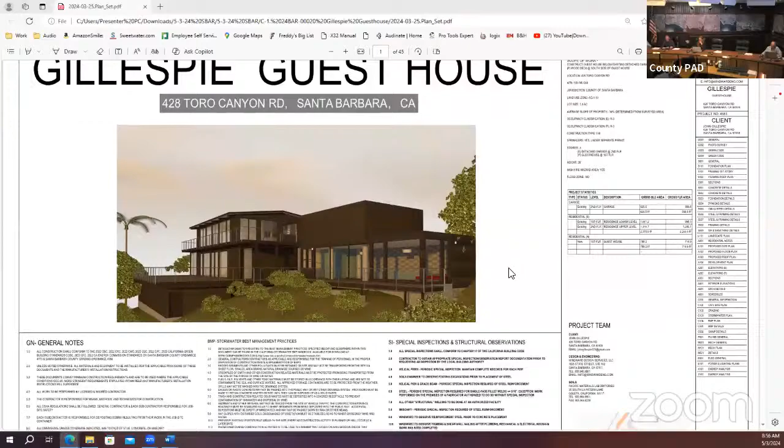This is the consent calendar for the May 3, 2024 SBAR. There's only one item on the agenda: 428 Toro Canyon Road, the Gillespie Guest House. We have two important comments — it's a nice project, very technical and landscape appropriate. I just have one question, on the second page, about whether the pool deck is not part of the project. Yes, that's correct. Between pages 30 and 35 you can see the project, and it's pretty well done.

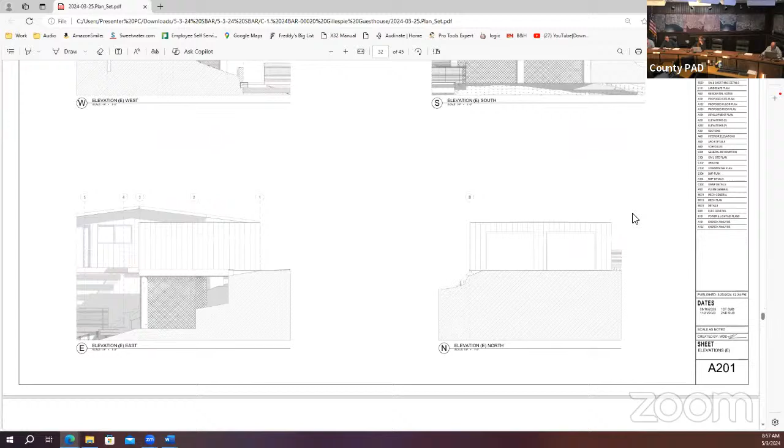Go to page 30, I think that's where they start showing the project. There's a lot of civil detail because they're civil engineers. The materials aren't very well shown, but they're matching the existing, right? Yes, our proposal is to match the existing. And there's no landscaping shown, right? We do have a planting plan — it's a landscape plan that comes before the architectural sheets, right before our site plan.

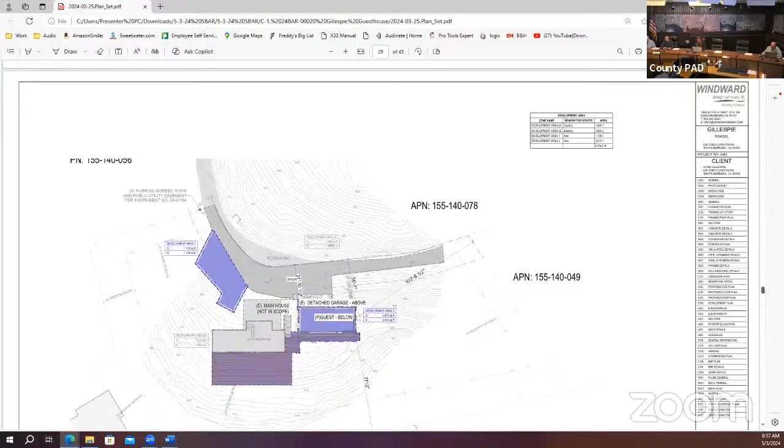Actually, sorry, it's toward the end. Was this it? Yeah, there's somewhere at the end — there it is, this is our planting plan. And the proposal is right above this image, top left. It's just like Yankee Point — a deep shrub, natural plant for hillside retention. I think we saw it before. It's all good, very good. So we'll approve it at the main meeting, okay? Very good, thank you. That completes the consent calendar.

I forgot my phone and my bicycle. Okay.

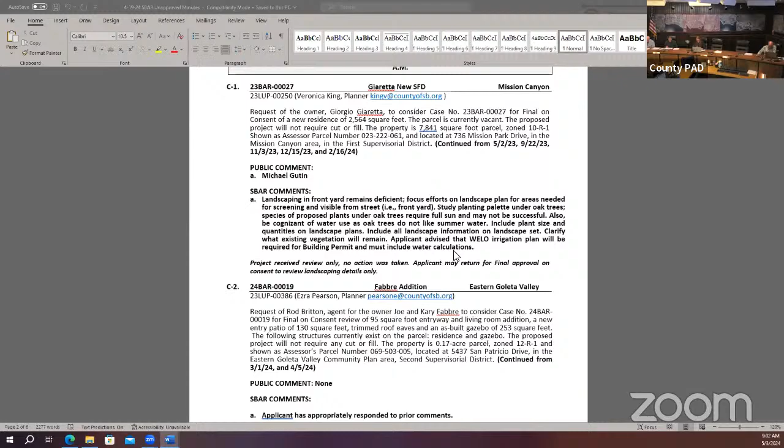Right. No, I think the second sentence should say restudy planting, not study, but restudy. Yeah, I was suggesting to remove that sentence. Oh, and then just say: provide planting for the front yard that is appropriate for underneath the oak tree. Oh okay, got it, that's better — that's what he said in the meeting. Okay, and then the rest were given final, so we can move on.

Is there a better way to describe the design than squat? Hmm, sorry, what was that? The comment D says the design appears squat in some areas. I think that was a comment from Chris or Alex, regarding the elevation. It's not an architectural term, but I think it's clear — it looks like a pancake. There's no hierarchy; usually you have some elements that are higher and can exceed the height limit, like a tower or a point of the roof. I think that's what the comment is about. I didn't make the comment, but I think maybe Valerie or somebody made it — I think it's appropriate.

We could just say: consider integrating limited architectural projections above the standard 16-foot height limit, as allowed by code, to provide more variation in the roofline. And delete the first sentence about the design appearing squat in some areas — I think it has the same intent. That sounds like you're being mean to him. I know, saying the design looks squat. Not our intention, if you're watching.

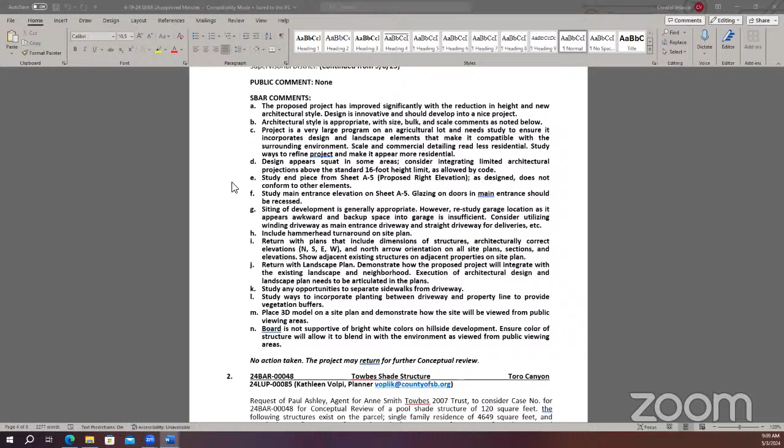I would just clean up the grammar a little bit: this is a very large project on an agricultural lot, instead of 'project is a large program.' Okay, yeah, this is a very large project on an agricultural lot, etc. Okay, good, great.

The next one, maybe we can skim past 2 and 3. Item 4 has some comments.

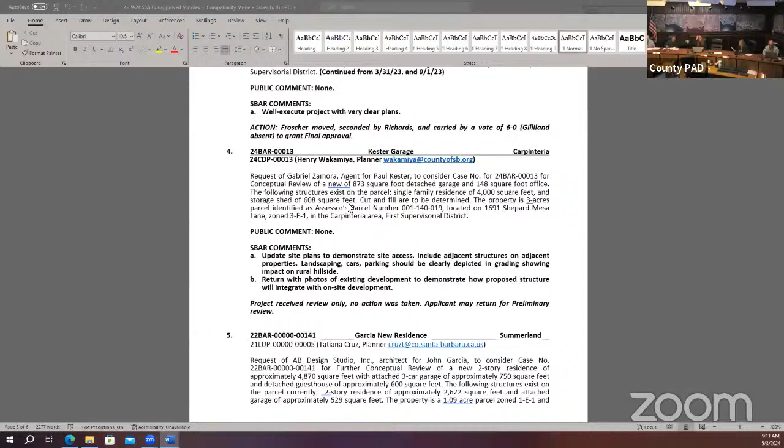I would upgrade the first sentence to say: update site plan to show pedestrian and vehicle access. Okay, that's it. It also says landscaping, cars, parking — landscaping and car parking should be clearly depicted.

It's confusing, landscaping, cars, parking. Well... semantics.

Just to ask the landscape people, what does C mean? Landscaping is sparse on landscape plan. Does it mean the landscape seems deficient or sparse or limited? How would you like to say that?

I mean, the next sentence describes it a little better: show existing planting and increase planting to biomass throughout. Okay, if you're happy with the first sentence... you almost, I guess we don't need the first sentence, but the second one is more descriptive. Okay, eliminate the first sentence then.

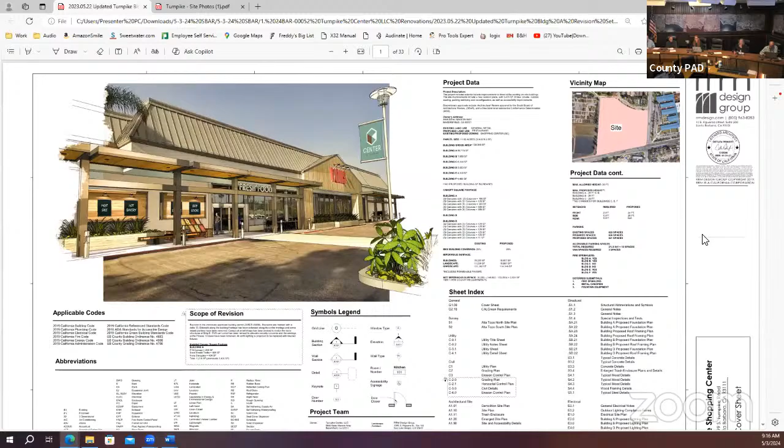Actually, go next sheet. Probably like 3 more sheets after the civil. Next. There's a lot of civil sheets, right?

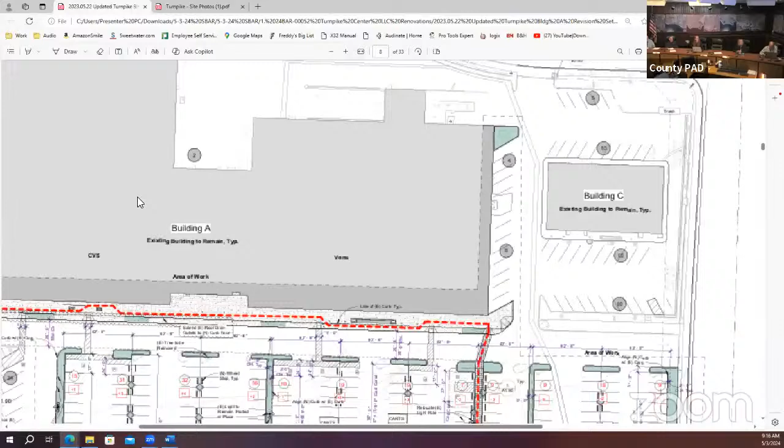If you zoom into the Building A portion, yeah, so previously we had widened the sidewalk just in front of Vons, and now we're continuing the expanded sidewalk all the way down.

We've taken away some planters that were adjacent to the building just for waterproofing and logistics. The planters themselves were getting very narrow to separate it from the building. We've replaced those with some movable pots that are fairly large, and we've got a couple of them over at Building B as well, so it'll be consistent through the center.

Next sheet, go down to the elevations, I think I'll—all right, if you want to zoom in, the clouded areas are kind of what we've revised.

Our planner asked. So in these, we've added a concrete base to match Lighthouse Coffee—before we had the siding going all the way down, and just logistics of shopping carts and things. The concrete base was nice. There were 3 awnings on this, and I think by the time signage gets up there and everything, it looked fairly busy, so we've removed the awnings. There was a building mounted planter there, and in these elevations, I'm not showing the movable pots or the bike racks or the benches, and so all of those will kind of fill in the space adjacent to the building.

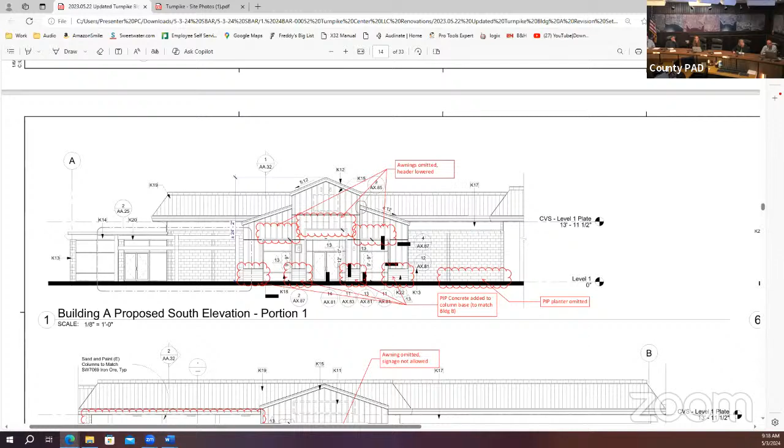If you scroll down a little bit—sorry, just for clarification, that's the Vons elevation. That one is actually Fitness 19. Okay, so I'm starting from the west side.

This is CVS. CVS had an extended pop out that was primarily for carts, but really CVS doesn't have that many exterior carts, and there were some security concerns that it might be hard to secure and somebody might be sleeping in it. They've had an instance of a fire in front of the future cantina area, so we're trying to eliminate an area like that. That's opened up. Again, the concrete base, and we omitted an awning there with the signage. It was fairly busy, and I think looking at the Lighthouse Coffee facades, it just wasn't necessary to have the extra awnings.

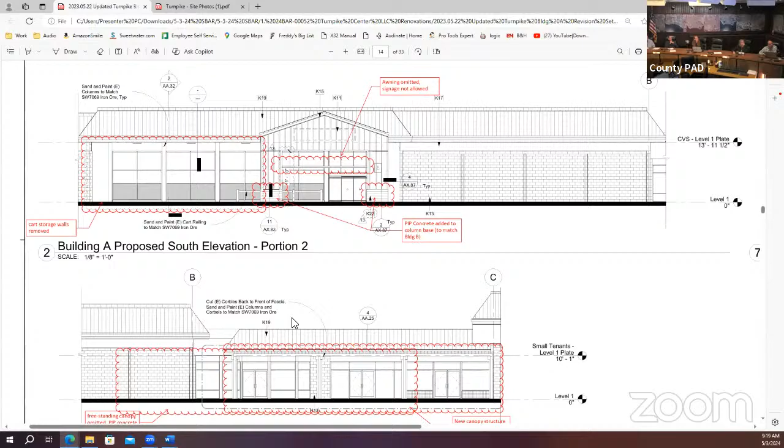Scrolling down, and oh, go back up actually. And this—the owners have acquired a large bronze duck, similar to some of the others that will be in this little area, kind of for kids to play around and nice energy for outdoor seating.

Scroll down, please. This one is kind of the west end of Vons. We just shortened the trellis that was in front of there. And I think we've added some bike racks and pots there too, just to make sure we have enough room for the bikes that are currently cluttering the sidewalk.

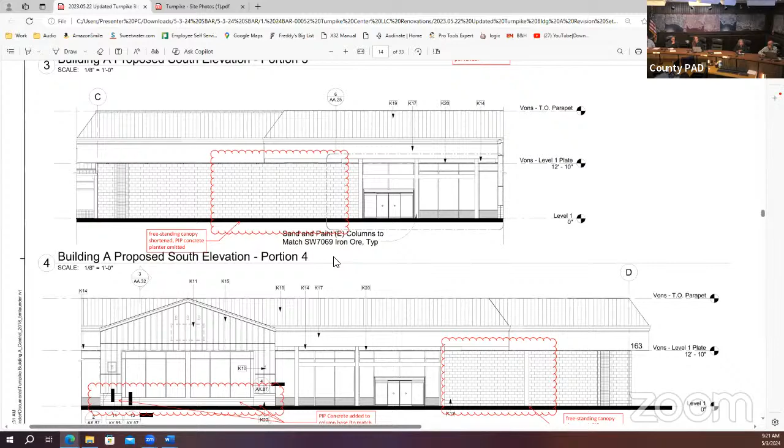Scrolling down to the front of Vons, I think we adjusted that planter a little bit just to make sure we had room for the carts and people walking by, and to maintain our fire lane, and also kind of shrank that trellis that's adjacent to it.

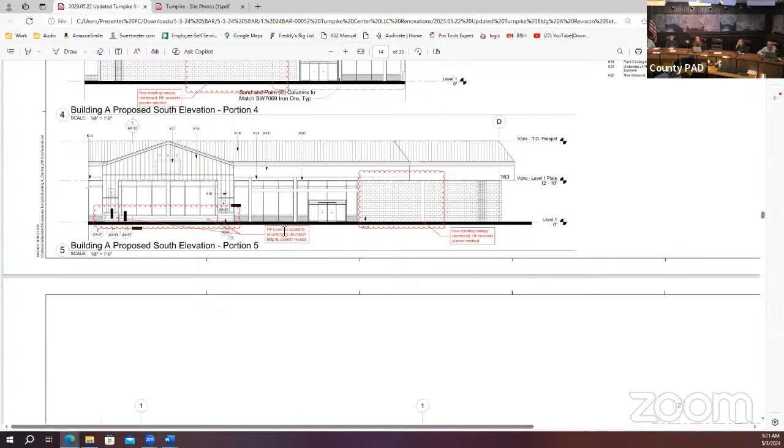Yeah, I think that's it. We can scroll down to the landscape plans towards the end. Yeah, yeah.

Yeah, so kind of zoom in to any of the building. Can we zoom in on that - just really, what's changed in the planting plan, Dan? Yeah, I mean, yeah, this is fine. Scroll up towards the building.

Zoom in. Up, yeah. The parking lot hasn't changed, but we're just kind of showing some benches and pots and

some bike racks - they're very faint on there, but the large duck isn't shown on this. I think that's the bulk of our revisions.

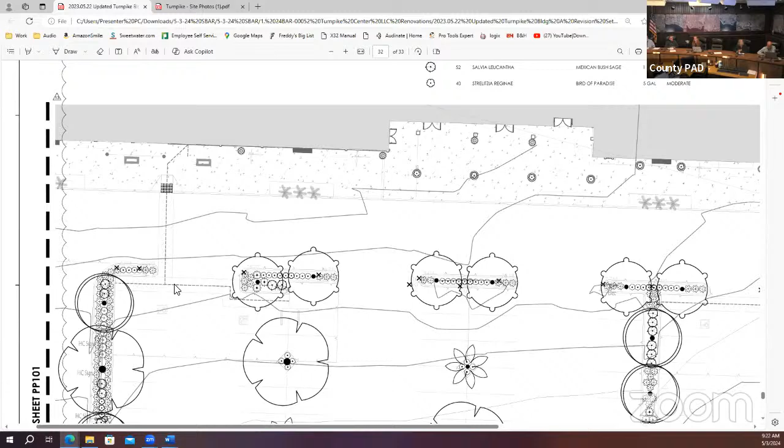Okay. Thank you. Any questions from the board?

On this plan, where were the planters that you removed along the building? I think there was one on either side of the recess - you can walk up and demonstrate. There was one on either side here.

Okay, and there's pots now. Yeah, there's several pots - all of those are pots. And where are the bike racks? There's the bike rack, there's a bike rack.

Are the pots or bike racks identified in terms of what they are on the plans here? Yes, they should be. I had sent a photo to our planner, but I don't know if that's in the files.

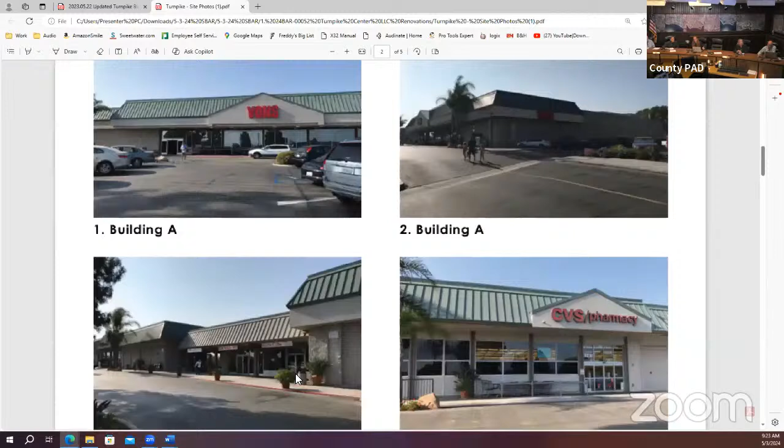Go back up. No, they weren't in yet, but there's an existing one in front of the Lighthouse Coffee. They're the concrete ones - the big concrete ones.

We have both trash cans and planters that match. There was an image in this that had Lighthouse on it. Yeah, go down. Yeah, but I think it was before we got them.

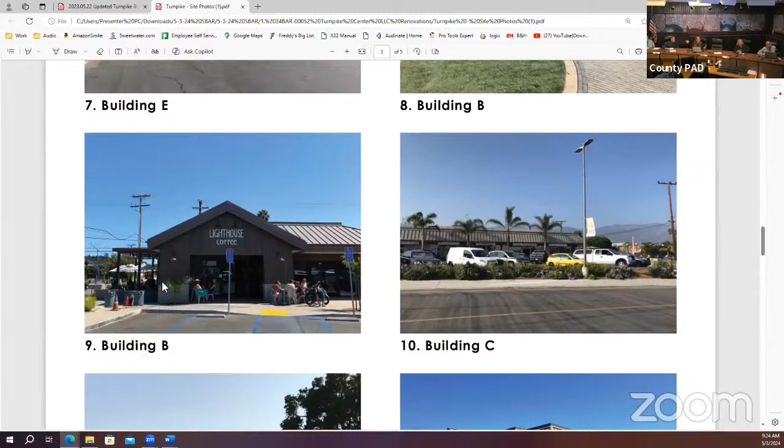Still - oh yeah, right now there's one sitting right there. It's not there, I remember - right there, smooth concrete, probably about 42 inches tall. Yeah, they're probably.

I have a question. On sheet AA31, do we go there? The light fixtures seemed kind of big.

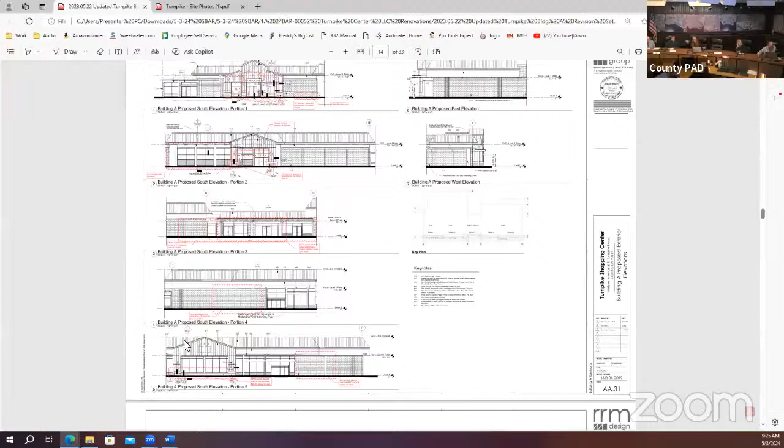Yeah, it's AA31. Those - these light fixtures, or the ones above the sign? They're kind of large. Have you changed those or?

The actual spec was approved previously under our previous permit, and they're installed at Lighthouse currently.

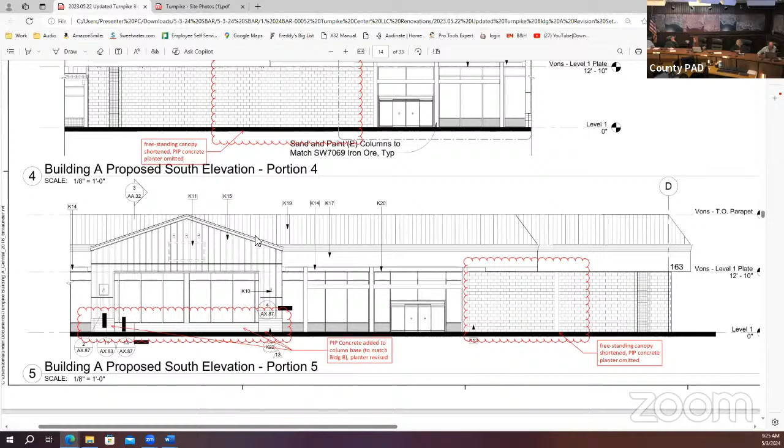Well, maybe I noticed in the perspective - let's go to the perspectives, the first sheet. Scale.

That's the original. Oh, okay. You mean those? Yeah, yeah. Uh-huh.

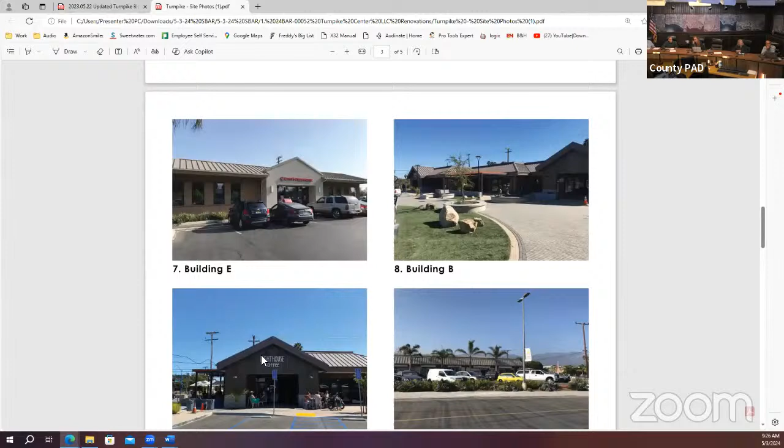Go back to the photos, please. There. Those and those are the ones that are spec'd. Zoom in - it's kind of blurry, but pixelated. While we're on this image, I have a question too.

So your original perspective of the trellis - it's enclosed, like it has a surrounding fascia on it. Will you see the rafter tails on it in front of Vons? Are you proposing the exact same in detail?

In front of Vons, no. But the small shops will be like this version of the trellis. And I can show you what the Vons one might be.

Scroll down. Yeah, right there, stop. The Vons trellis will be similar to those in front of the old one - can you zoom in on that? And we're all saying different things. Okay, yeah, that is what's proposed in front of Vons.

Okay, all right. I also had a question about the parking. If I remember right, just from driving in that parking lot, some of the aisles in front of Vons, even though they're 90-degree now, there's only room for one directional traffic - it's an undersized aisle.

Yeah, I think there's one wide one right now - maybe that's it. And they will be 62.5 feet. Will all get fixed. Okay.

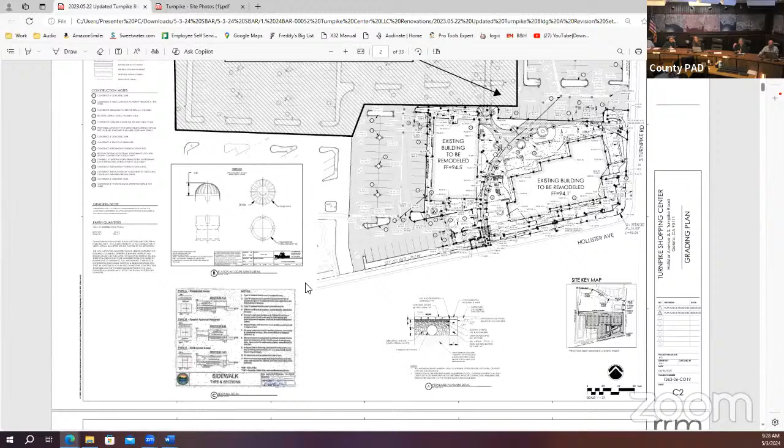Yeah, I just had a question. If you can go to a site plan, something that shows a site plan. Well, go down a few sheets, a larger one, yeah.

So in front, you mentioned that you removed the planters next to the buildings because they are awkward and have water problems and so forth. Did you add any other landscaping in between? I'm not sure which drawing it is. Yeah, because that wasn't showing.

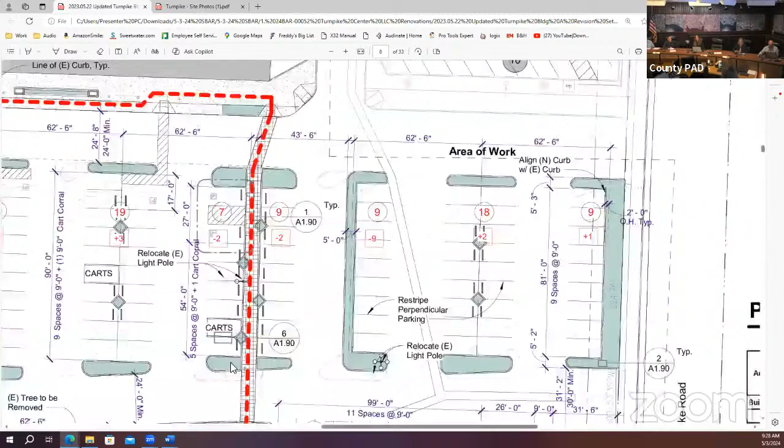Keep going, that's getting close. Zoom in, yeah, this one right here. So I think those were planters, yeah, there are some planters, show it closer to the building. Closer to the top building, the Vons building, yeah, there you go. So we've maintained these planters that have some palm trees in them. And what did you put, new planting? I didn't see anything. There's new planting going in there. Something significant. Okay, all right.

Okay, any other questions from the board? All right, we'll move on to public comment. Is there anyone in the audience or online? We have a couple of people online. If you would like to speak on this item, please raise your hand in the chat. Or if anybody in the audience has a public comment.

Seeing none, all right, we'll move on to comments from the board. John, do you want to start? Well, I think generally it's okay. They're adding more planting in the parking lot, which I appreciate. And I like the new entrance to the main entrance to Vons, better definition and a little more residential in scale, perhaps. So I think generally it's an improvement.

Alex? I agree. I just want to make sure that the landscape architects on this board take a good look at the landscape plan, because usually shopping centers are deficient in general. I'm not making any aspersions, but in general, shopping centers could use a lot more landscape, I mean in terms of volume, tall trees.

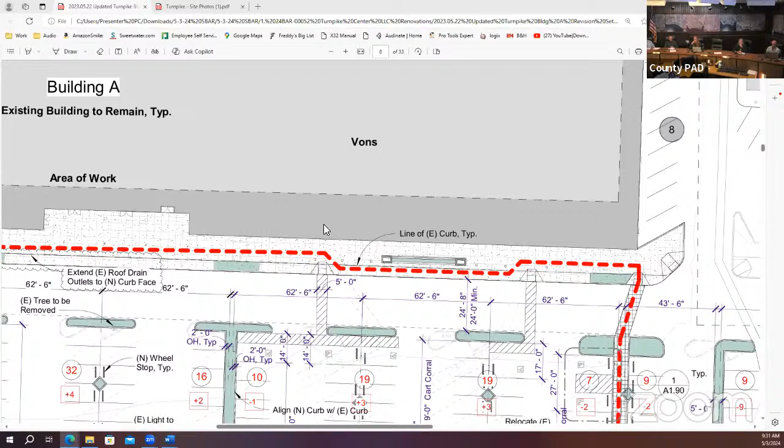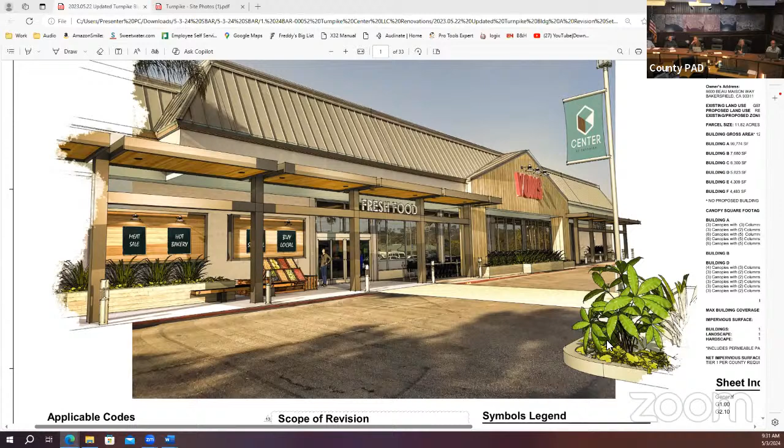You want to go up to the render? Original, that's the original approval. Yeah, with the planters, the planter on the left side is gone, but the planter under the Vons signage is still there. Oh, there is. And how much did you shorten the trellises? Are they shortened from what's shown here?

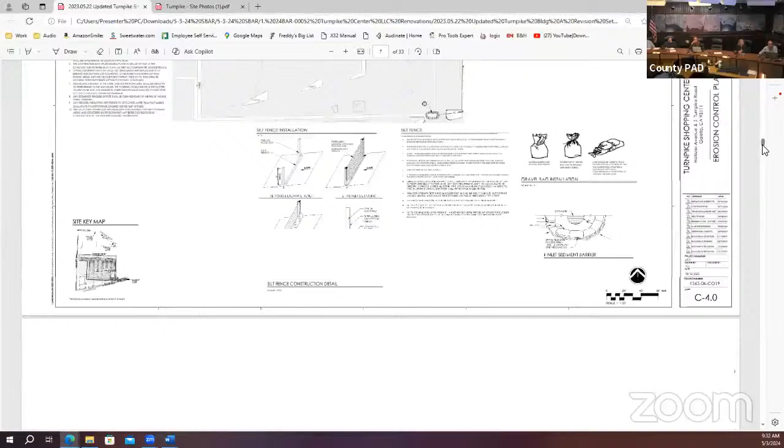I think you just want to make sure that all that planting looks consistent with what you're proposing. And it would be nice to see what's gonna go in the pots and the bike rack, I think. That's my comment. I agree, seeing the pots, I also think studying whether there's an opportunity to have maybe a different size of the same style pot, like maybe it's wider and squatter so you can get a small canopy tree or something in there. Cause if I remember right, the current size is upright and vase shaped, so it isn't really a tree pot, I guess. So if you can get more variety in there. And then I agree with the comment to make sure any existing planters, I think, are gonna see some damage through construction, so if you can show proposed planting in all of them.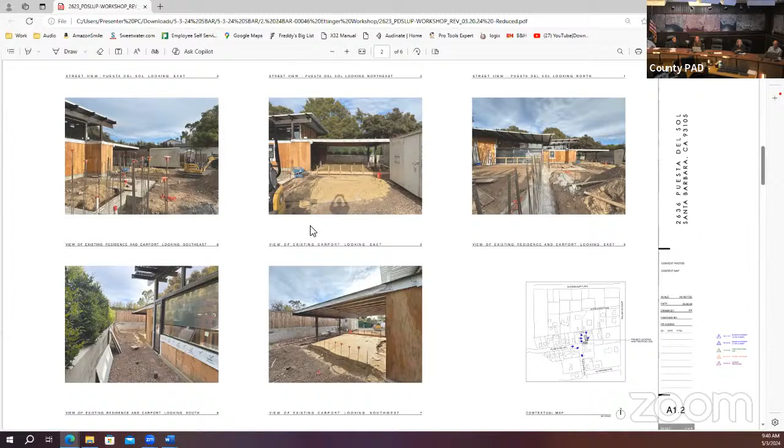If we go to the next sheet, you'll see an existing permitted site plan on the left showing the carport, and the proposed enclosure of the carport on the right, shown shaded. We still meet the Santa Barbara County parking requirements: 2 for the house, 1 for the ADU, and 1 as required for Mission Canyon, so 4 total off-street parking spaces.

If you could go to the next sheet, please. Same idea — if you could scroll up just a tad, there you go, so you could see both plans at the same time. Carport on the bottom, you can see those three little storage pods to the north. That's all we have in the entire project; one's taken over by our utility area. So the proposal at the top is to simply enclose that area and convert the middle one into a little toilet room, top center.

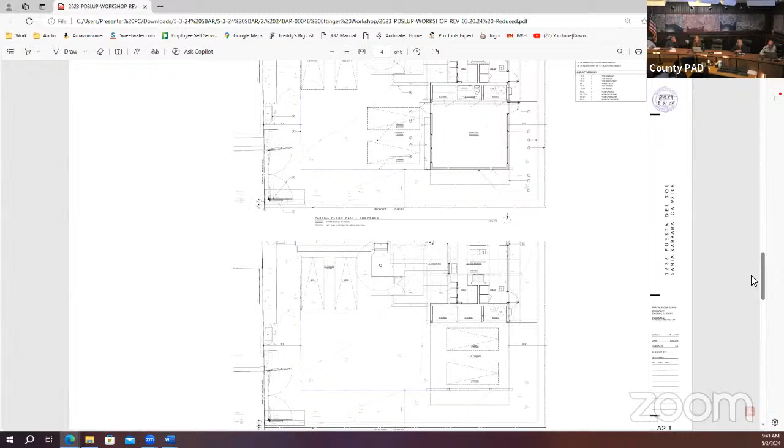If you could go to the next sheet — left-hand rendering as permitted, right-hand rendering with the enclosure. We're trying to downplay the entry to that space so it doesn't compete with our entry into the house, which is back beyond in the courtyard. The materials will be the same, 1x6 clear redwood that you saw in some of the photos. We're not proposing any changes to the landscape, drainage, or grading, or to the footprint — merely enclosing that space.

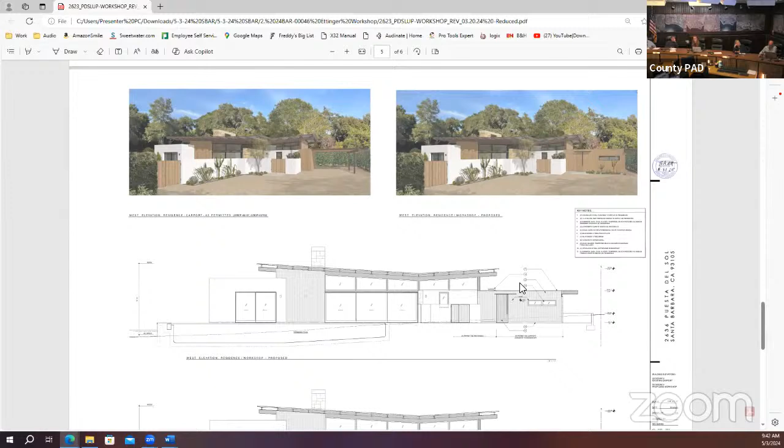You can see the architectural drawings at the bottom. Again, they're composite — the one you're seeing is the proposed, and if you scroll up a little, kind of redundant, there we are again with the carport. Then scroll down to the last sheet, please.

Again, comparisons on the left side, upper, the carport as viewed, and on the right side, cladding with the redwood, not really seen by anybody — it's pretty tight against the southern property line. On the middle sheet, there's a high clerestory window in the workshop with a glass door to let in a little light. Again, all the materials are the same, no other changes. It's about 370 square feet of enclosure added to the project.

Thank you. Any questions from the board? Was it frustrating for the owner to work with their architect like that? It's really challenging, to tell you the truth — we just have big spaces with no storage. It's a predicament that should have been avoided, but this is our proposed solution.

Any other questions? All right, we'll move on to any public comment in the audience or online. If anybody has a public comment, please raise your hand in the chat. Seeing none, move on to any comments from the board. It's pretty simple, so if anyone has a comment, I'll just... yeah.

I think it's fine to move on to prelim final on consent. Agreed — good to go? Good to go. Thank you very much, thank you. Nice day, thanks, enjoy your storage.

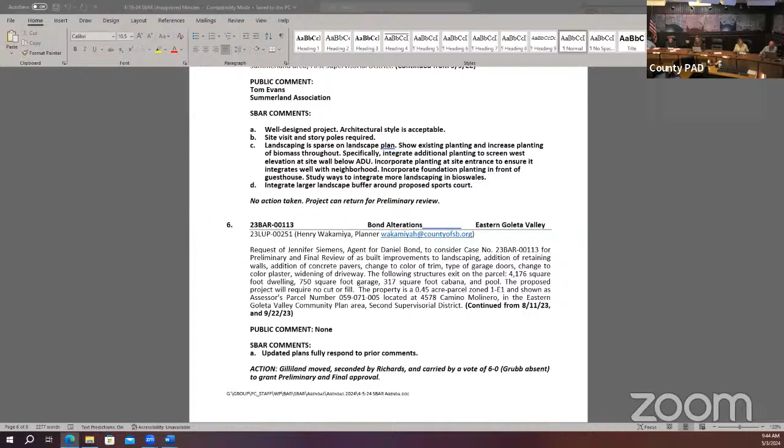Moving on to item 3, Anderson new single-family dwelling. The request of Heidi Jones, agent for Charlie Anderson, here for conceptual review of a new 2023 square foot single-family residence with a 609 square foot 2-car detached garage on an existing vacant lot, with uncovered parking, storage, deck, pergola, and associated landscape and hardscape. It's a currently vacant parcel, and the project will require 710 cubic yards of cut and 140 cubic yards of fill on a quarter-acre parcel located at 1429 Orange Grove Avenue in the Mission Canyon area.

The applicants can state their name and give us their presentation. Good morning, Heidi Jones here online. Chris Cottrell and Aaron Carroll are there in person.

I just wanted to give a brief bit of background. This came before the board in 2019, pre-pandemic, and several things transpired since that time. The board liked the colors and materials but wanted them to study the massing, and there were some neighbor concerns. Since then, the massing has been significantly reduced, the square footage reduced a little over 800 square feet, and the height reduced too. I think it's a great improvement upon the prior proposal. We've got a new team on board. Hugh Twibell should have sent comments to you from the Mission Canyon Association review that were positive. Received, great. So I'll pass it on to Chris and Aaron.

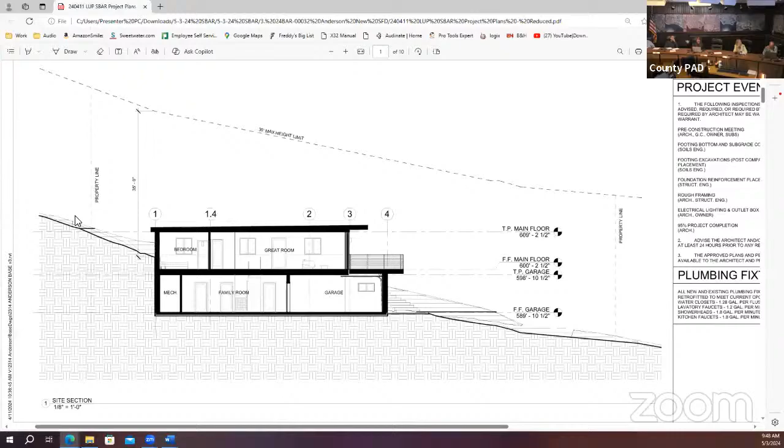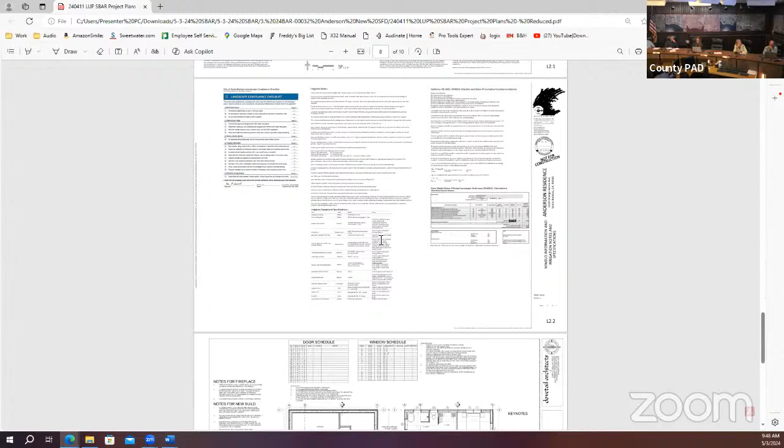If you go to page 8, I'll walk you through the plans quickly and then hand over to Aaron. The left side is the lower floor plan, with the garage, family room entrance, and interior stair, or you can get up to the main floor if you take a right parking on the driveway. There's a nice stair that uses the existing grade to get up to the front door. The owner is a local mason, so all the stonework is being built by him, which is a treat — I think it's going to be a nice little jewel.

The last page is just the elevations. The top elevation is looking from the end of the road — that's a view that doesn't really exist, since there's a steep hillside there. The middle elevation is the front elevation: stone base, stucco top, dark anodized windows. On the lower elevation you can see the stone datum coming up to the window line, so it's kind of coming right out of the ground. It's going to be a really nice looking little house. I'll pass it over to Aaron for landscape.

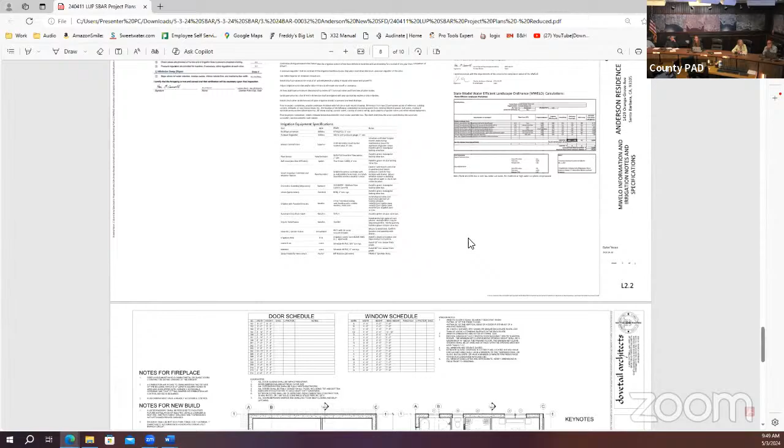If you want to go to sheet L1.1. There we go. This is the site plan.

Orange Grove is a private road and it's just getting extended. This is the last lot on the road, and it's not paved all the way to this lot. New paver driveway, and the owner is a stonemason, as Chris mentioned, and he's going to have fun building those steps.

He really wanted an organic design for the front entry stairs, so boulders, Cherokee stone with a handrail. And there's a little entry trellis there at the front door.

And then on the south side, we're terracing stone walls there to meet grade there, as you saw on the elevations.

There is one medium-sized oak tree that's in the way of Orange Grove that we are proposing to transplant. But we also are going to be mitigating for that tree in case it doesn't make it, so we're mitigating with one 24-inch box oak.

Next page, please. The owner really wants the landscape to be fire safe, understandably so. So the plant palette is almost entirely succulents, with the exception of the oak trees.

Lots of drought tolerant succulents, some of which he's already grown himself, but he's going to use. So a lot of agaves, echeverias, dudleyas, things like that. And then the existing chaparral type plants, which is like laurel sumac and stuff like that.

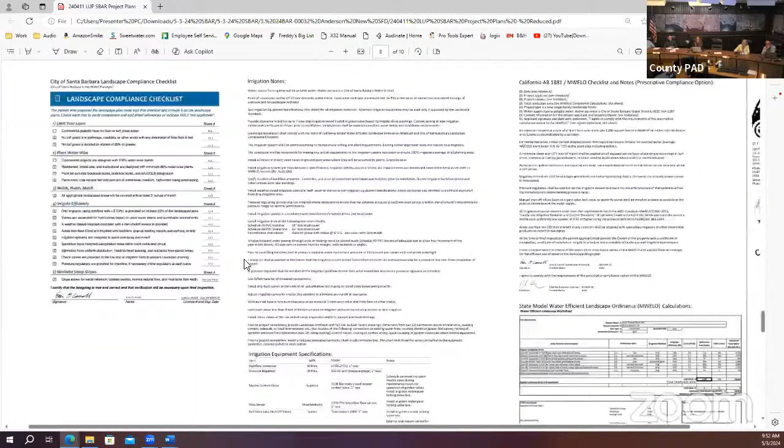All right, any questions from the board? Can we go back to the elevations? Last page, bottom.

So the lower walls are the stone? Correct, yep. And so it changes to stucco at the railing height? You got it, yep. And that's true all the way around the building? We're going to stop that.

There's sort of the lower left elevation, this north elevation, that is just stucco, there's not much there. Right, yeah. And then that, if you scroll to the top, yeah, there you go.

So this west elevation, that is going to stop at the barbecue. So that's the rear portion, going to be all stucco on this side. Right, and your grade lines, that's really in the hillside. Correct, yes. Okay, okay.

And what's the material on the fascia band? Metal fascia.

And what colors are you, or have you gotten that far? Yeah, if you scroll up a little bit, we've got the start of our finish schedule going, and I believe we submitted the color palette as well. Is that in there? It says Mesa Verde. Yeah, it's an integral color, kind of a muted white, like an off white.

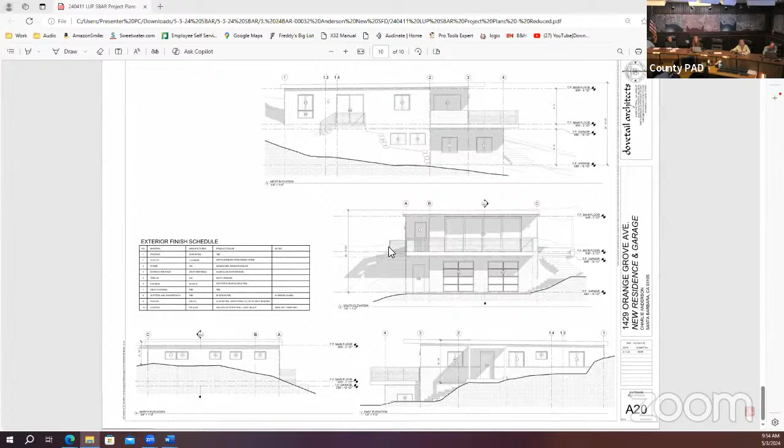Do you want to see it now, or we can just bring them when we come back? You don't have to bring it back. Yeah, it's okay, 'cause you have to come back no matter what.

And the garage doors, are they glass? I think that's TBD at this point. It wouldn't be, they're all cut in there, so it hasn't been determined yet. I think it would look nice with glass, but it doesn't have to be.

But it does face out to the road, so it might be some night lighting that might not be wanted. Okay.

And the railing? Yeah, black metal railing, cable rail with a black metal cap. Yeah, it's fire safe, like this whole thing. There's no exterior wood. Even that front pergola is steel.

Questions? Okay, we'll move on to public comment. We did have one letter that was in favor of the project from, let me get his name, Hugh Twyble. Is there anyone else in the audience or online that has a comment on this item?

We have two hands up. We will go with Ginger Sledge. You have 3 minutes.

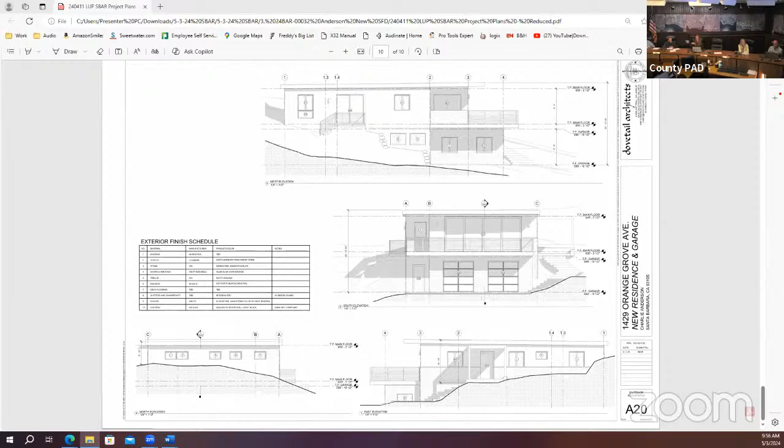Go to the first page. Is it the first page? I share the easement with... no, it doesn't show. None of the pictures show the direction towards my house. None of the photos that have been included. There's nothing there. If you keep going down, there's one page that shows a map with different surrounding houses. That's it, there we go.

Okay, yeah, and it says 1405 Orange Grove, but it's actually 1405 Tunnel Road is the address. But I back on and I share an easement with this proposed house.

I just have a couple of questions. It has improved since the last time, and I know we're just going to have to be really cognizant of it, it's a very tight constrained lot with a very big culvert where all the drainage goes down onto my property. So I've mitigated drainage on that property for quite a long time with retaining walls and French drains and all of that. But even with the recent rains we've had, I've had quite a bit of flooding. So I'm just going to keep an eye on how this progresses.

I do have a question about where the oak tree is that the landscape architect or the architect said may have to be removed. I wasn't quite sure when he was describing it where that is. So I wanted to find out about that.

And yeah, I'm just concerned. I know it also says in your description that it's a detached garage, but according to the plans, it looks like it's just dug into the hill. So I have a question about that. I don't think it's detached, but I don't know.

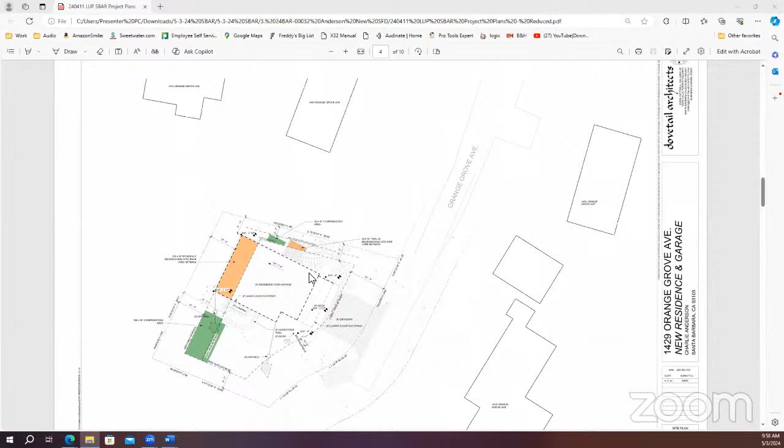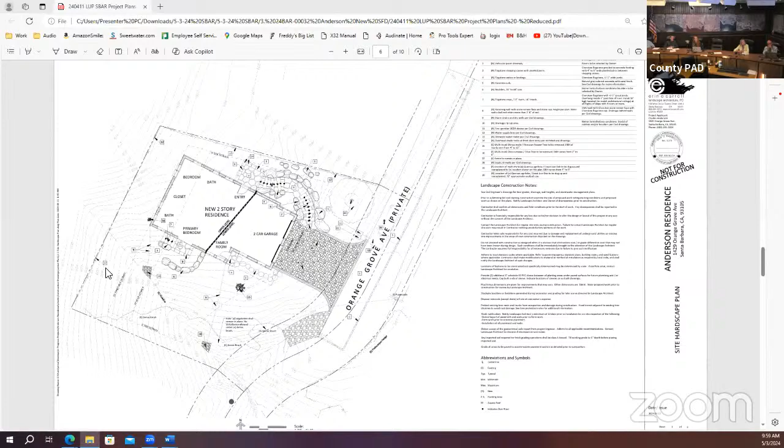And I think there's more. Where is the oak tree on this plan? Yeah, sheet L1.1 shows it more clearly, the landscape sheets. There we go. So right where it says private on the road there, left of that, other side. Right where it says Orange Grove Avenue, there's a number 19, that's where that existing oak is, where Orange Grove is being extended. And then we're just going to move that tree up the slope a little bit.

Okay, and what's number 20? Is that the location of the new... That's the existing oak. No, the transplanted oak. Okay, okay.

Okay, I think there was one more public comment. Yes, Howard Schleifer, go ahead and speak.

This is Howard Schiffer. I live at 1450 Orange Grove Avenue, so one house or two houses closer to Tunnel Road. My concern is a few things. One is obviously fire, I wonder how many cars are going to be using this property. That street has gotten much more densely populated, and we lost our house in the Jesusita fire. So obviously that's a concern.

Drainage is a major concern. I think Ginger mentioned that this neighborhood has really come together to try to make sure that no additional building was done that was going to add to the drainage problem. The county has helped out with a culvert under Tunnel Road, so there has been some mitigation, but it still is a major issue.

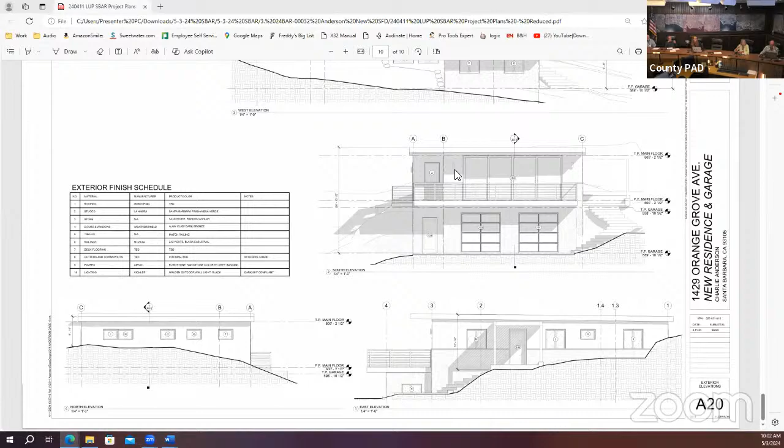Well, I'm remembering now, we did do a site visit to it, and this neighborhood has had a lot of issues, both with fire and drainage, over many, many years. Certainly this looks like a good proposal, vastly more appropriate in size for the property. I like the stone detailing, the architectural detailing, though probably as nice as the glass garage doors are, it shouldn't be there. I do think that real story poles at the four corners would be beneficial for this neighborhood because they're so engaged in this process, and it's been like that for many, many years. Anybody that comes into this neighborhood has to kind of jump through some hoops to get there.

Alex? I like this proposal a lot. I think it's a lot better than the previous one. I would like to see the colors, and if there are any renderings, 3D renderings would be nice to see. These pictures are hard to read in the sense that the stone is not very clear. From a distance everything looks like a light gray line, but once it's rendered it will be very good looking. I agree with the comment on the garage doors. I don't think the glass facing the street is really that appropriate. Maybe something else. I understand it matches the style, but it doesn't seem appropriate for the location.

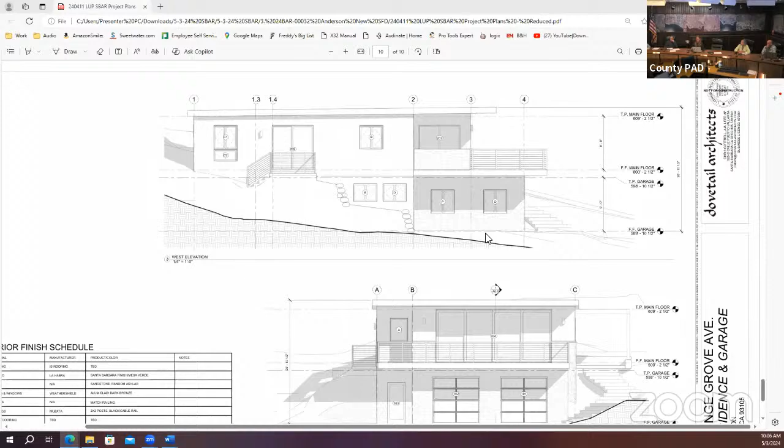You guys addressed the fire concerns. I was wondering if you had any comments towards the drainage concerns for the neighbors. Looking at your landscape plans, it looks like you're implementing dry wells and stabilizing riprap to try to address drainage. Is there anything else worth sharing with the neighbors to address that concern, or is that just standard practice? I don't know if you have the civil plans in here, but we do have full civil plans. The downspouts are going to a dry well and then they overflow to riprap right at the existing flow line of the swale, and then Orange Grove has riprap as well, going to the swale.

So my comment would be that it seems you guys have worked in a logical way to try to address the concerns of fire and drainage here. As far as I can see—I'm not an engineer in designing a drainage system—but the landscape planting is sensitive to the fire concerns, and I think it's appropriate for the area. I have nothing but positive comments for your project.

All right, yeah, I have positive comments too. I do think a rendered either elevation or perspective would really help visualize it a bit more. But I think the plant palette is appropriate and the landscape plan is appropriate. And I think the masonry will go a long way to knitting it into the hillside.

I agree that it seems as though the drainage concerns are addressed. Just a note to the public commenters that drainage and fire don't land specifically in our purview, but it will go through the planning process. So if you have concerns about those items, make sure to email the planner involved in this project. But it will have to go through vetting through fire. Have you guys, has the applicant gone to fire yet with this? Okay.

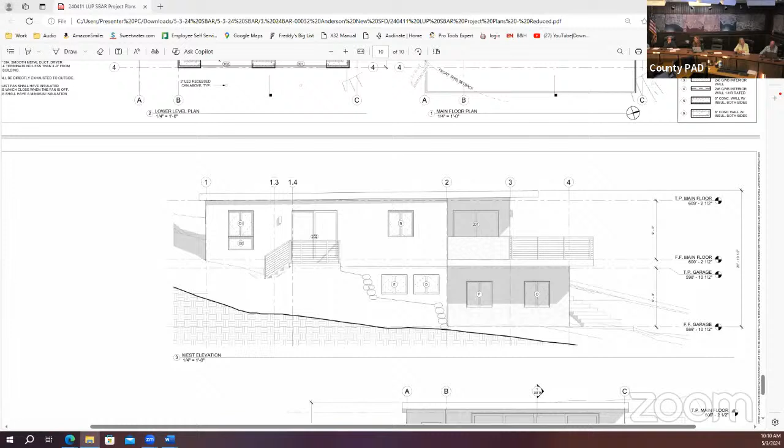And carry through all the way to the west end. Yeah, so it would hit that sill, kind of the window, or the mullion - it would have to interact with the window. Okay, all right, so we'll ask the planner to agendize you for prelim, final, full board. Thank you so much.

Okay, item 4 is not here today, so we're moving on to item 5, the Ravanshenas addition and accessory structure. Request of Nello Manciotti, agent for Shahir Ravanshenas, here for further conceptual review of a dining room addition of 154 square feet, 576 square foot artist studio, and 100 square foot wine cellar. There's an existing 2,000 square foot main residence and a 500 square foot garage and laundry room. The project will require no cut or fill. It's on a 1 acre parcel located at 2940 Torito Road in the Toro Canyon Community Plan area. I'll read the comments and then the applicant can give us their presentation.

Nice project. Additions are consistent with the existing structure. Return with a site plan clearly demonstrating existing and proposed. Include site section showing slope of site. Include existing and proposed hardscape. Simplify the site plan as shown, too many lines clutter up the plan. Locate all existing trees, including type and size, and demonstrate how additions will impact those trees. Return with a landscape plan, study how the Koi Pond integrates with the artist studio. Existing French doors in blue in photo number 7 and double hung windows in photo 2 do not match the existing style of the structure. Address this with the project to improve continuity with the rest of the structure. And it's here for further conceptual review. Is the applicant online?

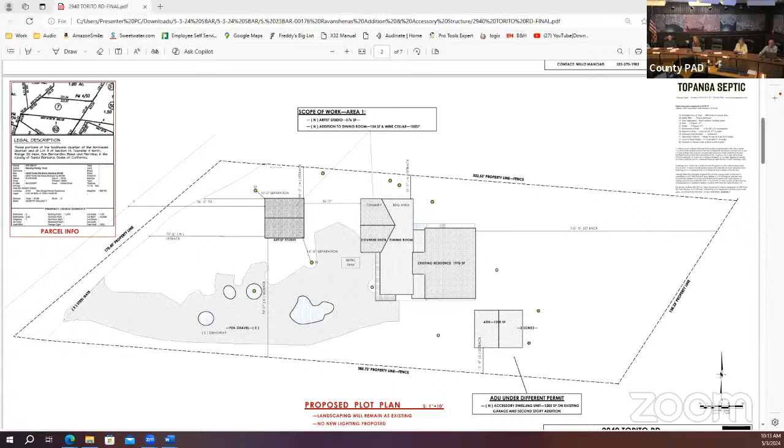Maybe we can scroll to the plan that shows the trees to ensure that comment's been addressed, since it's pretty straightforward. Oh, do I need to bring this back?

Was this the tree plan you were talking about? Like the existing plot plan, sheet 1. Just seeing if the trees are identified or not. Robert, have you already looked at this? I don't know if I see all the trees being identified. This is the plan that has too many lines.

It's to the point where it's the same as having no lines. I mean, there's just so many. I'm also just not seeing a legend for the tree inventory, existing tree inventory on the site.

Hello everyone, this is Olivia, the planner for this project. I'm noticing it looks like there's two different profiles for Nello. So if calling in doesn't work, maybe he could try to unmute the second one. I don't know if that's causing the issue. He's on twice, I see that. Yeah, he might have shared his link, but that shouldn't cause an audio issue. Yeah, okay.

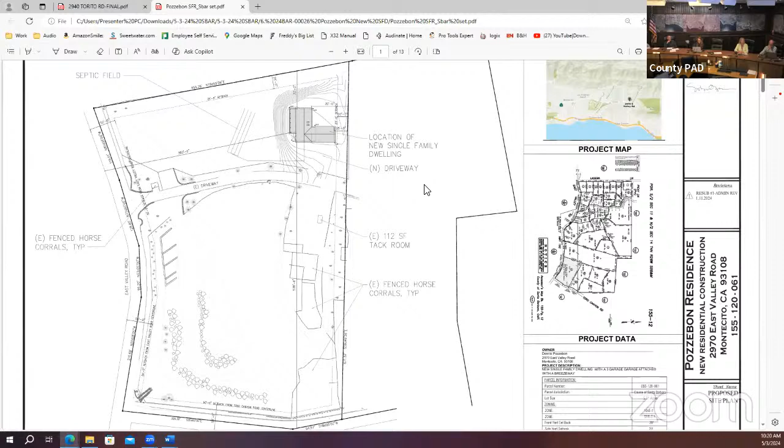This is the house plan. It's a 3-car garage with a breezeway connecting to the main house, just simple rectangles. What are the elevations? Just board and batten, asphalt shingle, and I don't know, bronze windows or simple windows -- bronze clad windows.

Then there's a porch off to the south, top of the pad. It's all on one floor, so we can age in place and not have to trip around steps and stuff.

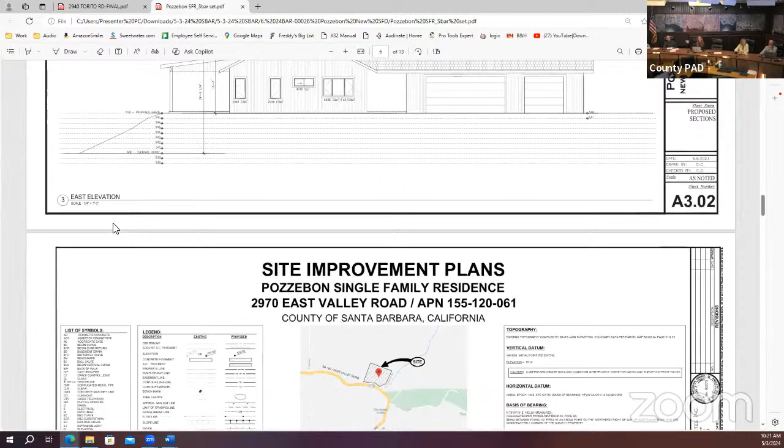We have the grading plans done by Flowers and Associates. They're having a hard time reloading -- there's photos on the left. There we go, maybe. So we're creating a level pad pretty much on the top of the property, but the neighboring properties continue to go up in elevation, so it's not like it's on a ridge line or anything. It's just creating enough level space in order to have the house. So continue down, I guess. Scroll.

Are you going to have a horse pasture in the lower level? Yes, horse pasture all around it. Yeah, they're horse people, so it's an equestrian facility.

Continue on. I don't know, this is Bill's landscape plan. He's done a pretty good job.

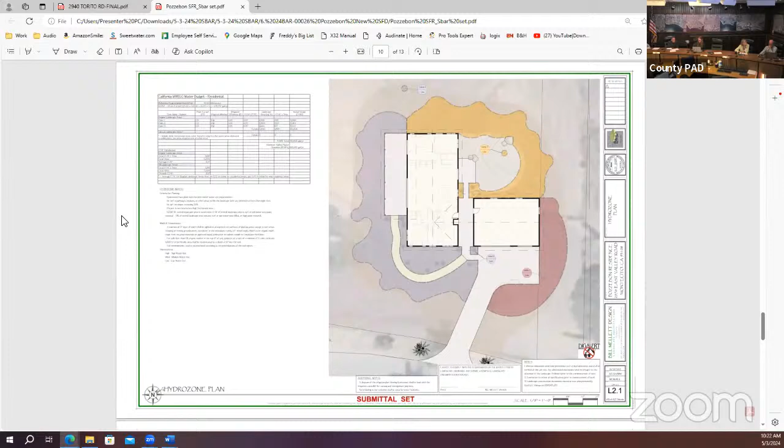I don't know what that is. Is that irrigation plans? Yeah, his irrigation plan. So he's got a few big trees, looks like, and some plantings to help with bank stabilization and soften the whole view from the neighbors on East Valley Road.

Continue on, I guess. Let's go to the site photos.

The middle view up there is from East Valley Road, looking up at the property, and the rest are from the pad looking down, looks like. Can you identify where, say, that center photo, where the house pad will be? Can you actually show us? Is it kind of in the middle of the photo there?

Yes, the one right in the middle. But it's not below those trees, right? Yeah, below the trees, but kind of where that dirt band is. That's correct. In the middle where the dirt is, yeah.

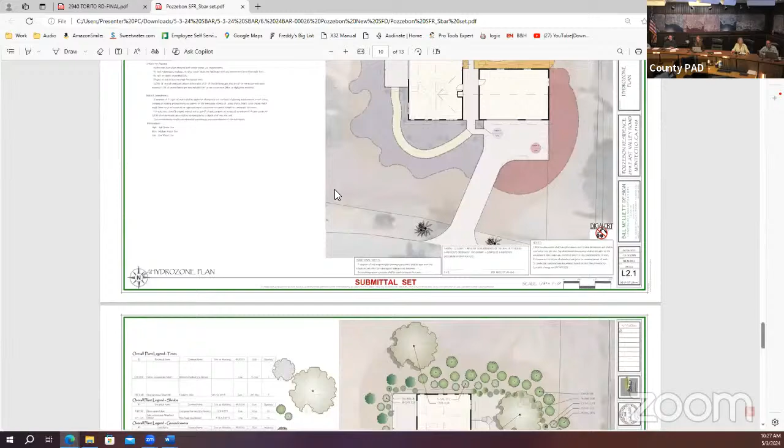The water comes down towards... the solar panels or what? Show the site plan. Towards the leach field? Yeah, sure. I think the swale stays to the west, looks like.

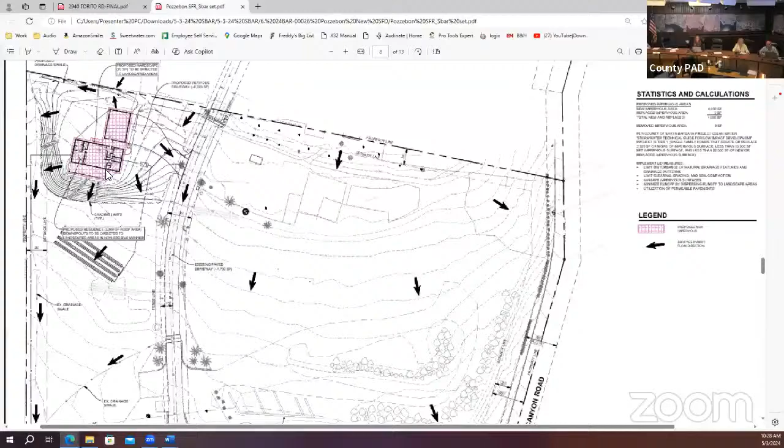Yeah, it's just, that's what she's asking. You can key that out more. I was thinking that too. It's just a little squished. Okay, I can make it a comment then. I just was wondering if there was a fixed reason why that extent was held.

On the west property, you can see it's going to be... on the west that makes sense. We can bring the southerly portion of that into a 3-to-1, something like that, and help soften that. Okay, sounds good.

We're talking cubic yards of soil. When you go more, of course, it's more grading, more fillers. And there's a septic system below that. Ours, they were staying away from the septic, maybe.

Okay, any other questions? We'll move on to public comment.

What are the materials? The driveway is road base, and then you have concrete patios around the outside of the home. The driveway was identified as road base and pea gravel. And then you have gravel in the backyard, it looks like - decomposed granite.

Okay, cool. All right, we'll move on to any public comment. I don't see anyone here. Is there anyone online? We don't have anybody online, and we have nobody signed up for public comment.

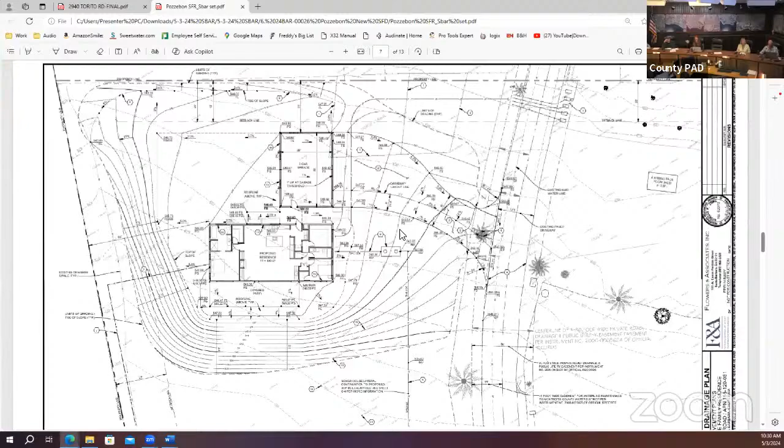Can you go to page 13, please? It shows the elevations. Is that 13? No, okay, so I'm confused - the elevations, where are they? Oh, page 4 and 5. I'm sorry, yeah, there we go, there's 4 and then 5.

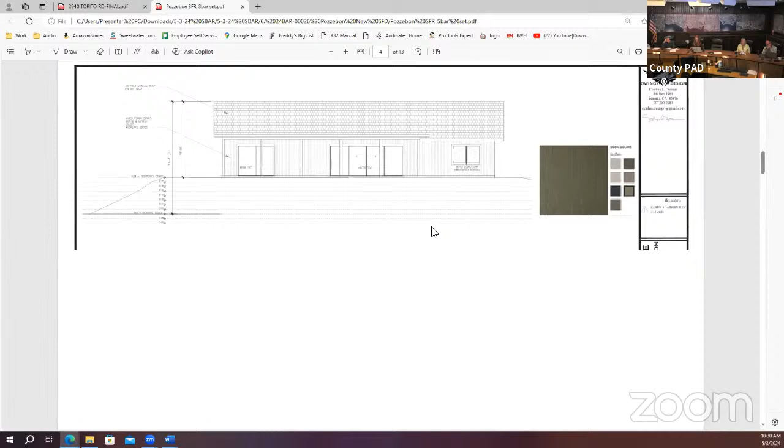Seems like a simple thing. I just have two comments. One, you see it in both - no, go to page 4 and then to page 5. Thank you. They see it both on the east and west elevations. It seems like the gable end vent seems to be maybe too large and out of the design, different from the rest of the elevation.

A minor comment - similarly, the eave, the steep eave, the connection with the porch, it's awkward. On the other side, go to the next page - it's resolved because the roof continues, and then the porch roof, it's not on the same plane as on the other elevation. Those are minor comments. I kind of wonder why the windows need to all be lined up at what appears to be 6'8". But anyway, they're minor comments.

So mainly two: the attic vent, and the connection between the porch and the side - not on this elevation, but on the other page, on page 4. Go up a little bit - which is, no, the other way. So it is the west elevation. That's where the connection - let me point. And those are my comments.

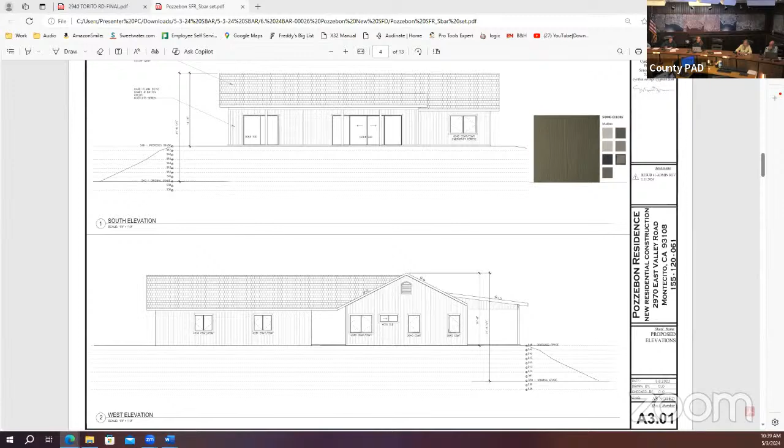Could we go to the landscape plan, please? 3.0. Yeah, the landscape plan, I think is great. It's an appropriate choice of plants. I think the comment on trying to extend the grading in front of the house, it's not a steep slope, would be a major improvement.

Tough to comment without seeing the thing in front of you, but the landscape was... you're just on the L1.0, 11th page, page 11, if you could load that. All right, there you go.

Just a few things to think on, that transition from the driveway to what is like the breezeway between the garage and the main part of the house. I think there might be an opportunity to improve upon the entry experience of how you're coming into this house. The way that the paving meets that gravel path seems a little forced, so I'd study that as a spot to maybe do something a little bit more than what's presented. And then I don't know if there's a need for any circulation around the other parts of the house, but that's one thing to consider if you need to go on the other side of the driveway around the back of the garage, or from your patio around the back side of the house.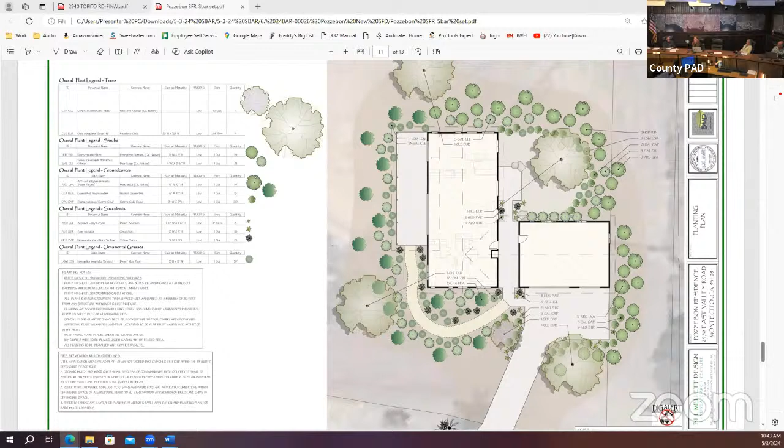We don't make a motion for conceptual. We just tell the planner that she, or he or she, can agendize you for prelim coming back.

Good morning. Yes, we're going to start with your item in one second. We're just finishing up with the last one. I apologize for the technical difficulties.

Okay, what you see on the screen right now is the proposed plot plan, totally clean without the trees and the canopies we have all over the place. The first page is with it, and the second page is without it. I signalized the hardscape, which is the driveway we have right now, with the pebble stone all over the place. We removed the koi pond, which was causing a little trouble, and the walkway.

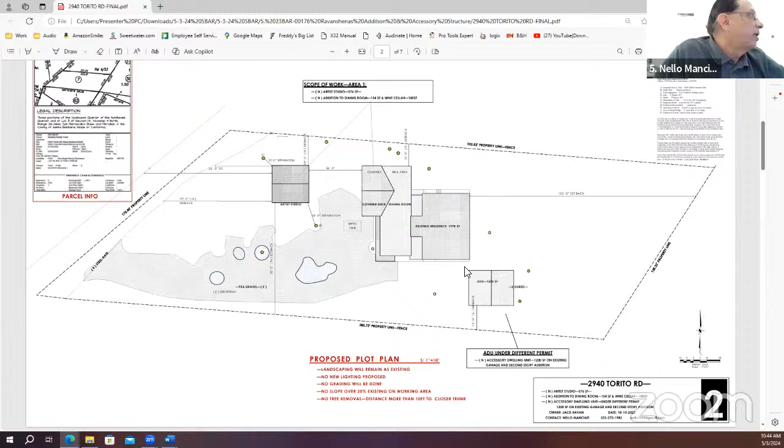So we leave the unit that will be the new artist studio just by itself. The landscaping, I include on page number 3, all the landscape we have, the main entrance, and if you notice, we have a canopy. We have like 35 to 40 oak trees that give shade all over the place. We plant landscaping in the places that receive sunlight, and the rest is existing hardscape. We are not planning to redo the landscaping, just leave it as original.

I noticed on the tree report that the two trees are 8 and 10 feet from the construction. We will not cause any problem to the trees. If any major mitigation measure is needed, we will probably do it with the structural engineer, but he said he cannot see any problem with that.

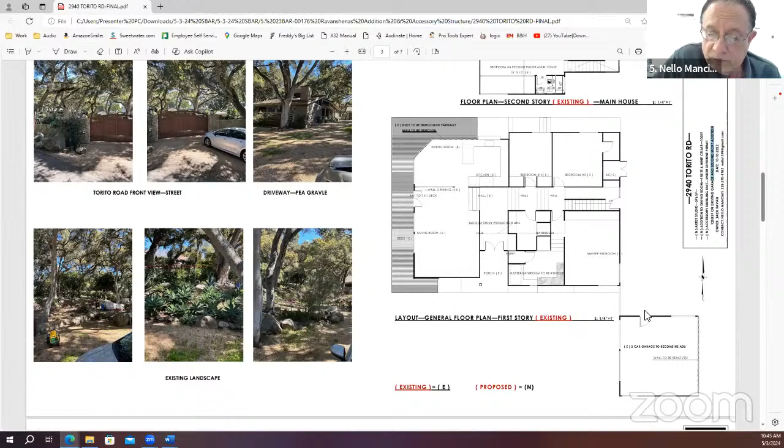And the doors were changed, you can see that on the elevation. Next page, yeah, we tried to use a nicer door, more modern, not those ugly French doors we had before. And I think that is for today.

Thank you so much. Okay, thank you. We'll move on to questions from the board. Yes, sir.

Is there a camera on the front? Next time, okay? What is this? Jonathan, I think you'll have to point. Yeah, what is that exactly?

Oh, those are existing columns. You can see the 6x6 all around the house with green paint, original from the original house. We tried to maintain the same original look.

So this is an existing piece of wood? Yeah, you can see it in the pictures separating the house. I included pictures of the house, you can see that it is original. And you're repeating that, right? Yes, all over the place.

Okay, and is this siding or plaster? Yeah, it's siding. Vertical or horizontal? It's wood siding, 1x8 all around.

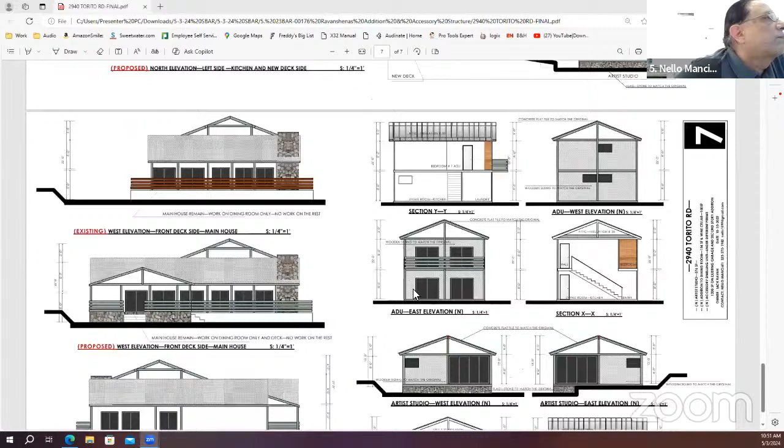So what are, on the proposed west elevation, what's the dimension of those posts? You have this on page number 6. Go down to 5 and 4. Yeah, if you blow up the elevations, you can see the finish, the wooden siding and everything, if you make it bigger on the computer, because the PDF file assumes you make it smaller. You can see right now, you see the siding clearly.

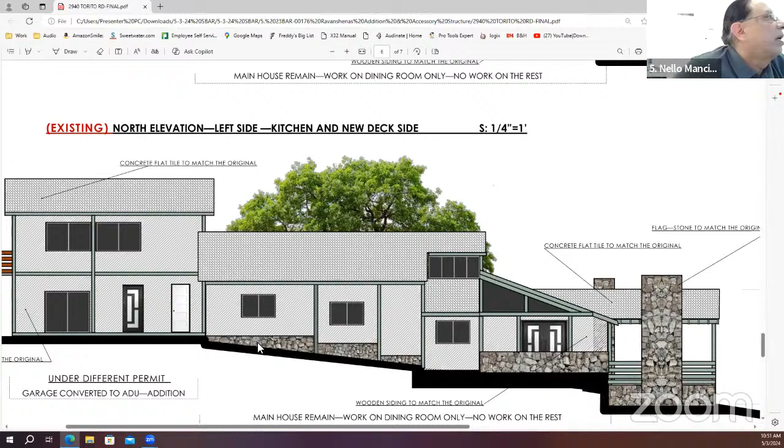And the size of the studio is on page number 2. You see it's shingles on top and it is the siding. I was asking about the dimension of the posts. Yeah, on page number 2, number 1, 2, 3. 3 or 2, please. Whoa. No, stay on the elevations.

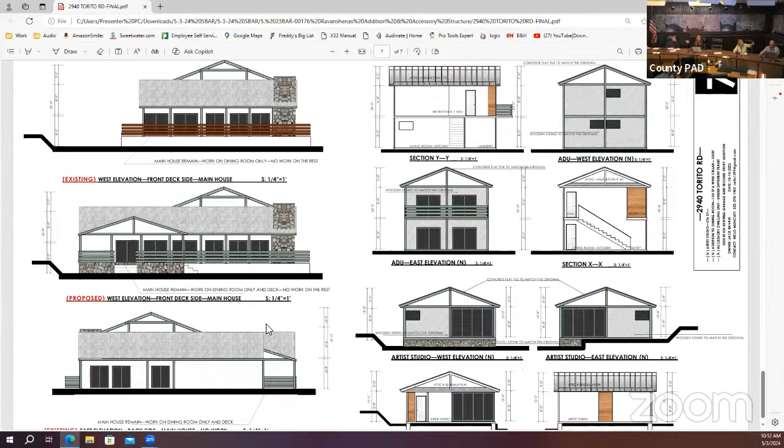Yeah, number 4, right there. Number 4 has the dimensions. Yeah, right, stop, that's where we were. I was asking about the proposed west elevation, front deck side, main house. You're showing a covered porch with posts. What's the dimension of those posts? Oh, the posts are 6 by 6, the same as the rest of the house.

Because I think this is all high fire, have you talked to the building department, fire department about what you can do in terms of building open arbor systems? I think the minimum post size is 8 by 8. Yeah, we will match whatever the building and safety requires. Well, but that's going to change the whole look of the design, so I think that's an important feature to understand before you start this presentation.

Okay, I understand. Because I think part of what Alex was saying about your computer-generated drawings is that you're using a hatch for your siding that does not reflect the reality of what the siding really is dimensionally, I don't believe. Okay, I understand. It looks computer pixelated, it doesn't look like a siding finish on a building. So that was part of that comment.

But in addition, you need to understand what the limitations are going to be on you structurally that affect the look of the elevations. We can't make a determination on this because I don't think you're going to be able to build it this way. Okay. Robert?

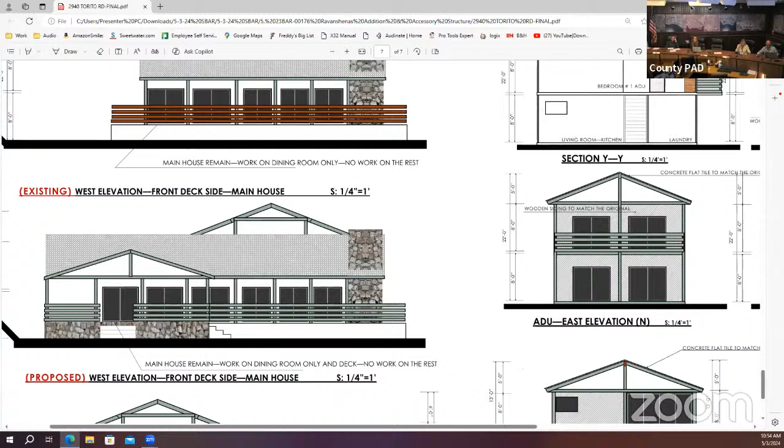This is a very challenging drawing to try to make sense of. Maybe there needs to be some hierarchy in the way the presentation is achieved, in terms of indicating the trees as a different color or something.

And then if you go to the second sheet, please. What is like a landscape plan, we have superimposed on it a roof plan. So we need to see the footprint of these structures, the decks, you have an artist studio which it looks like you're proposing steps up into. We need to see how all that works with the ground that's underneath it. So there's incomplete information.

I respect if you don't want to change the landscape, that's fine, but I think you still need to demonstrate how these structures land into the existing space they're in. It looks like you've eliminated the koi pond and the decks, so that's kind of simplified your proposal here. With this level of work on the property, I'd suggest studying the landscape would make sense, but I don't think it affects anybody in the neighborhood, and it doesn't really present a problem to me if you just choose to keep this as simple as possible. So I'll defer. Kaylee? Sounds good.

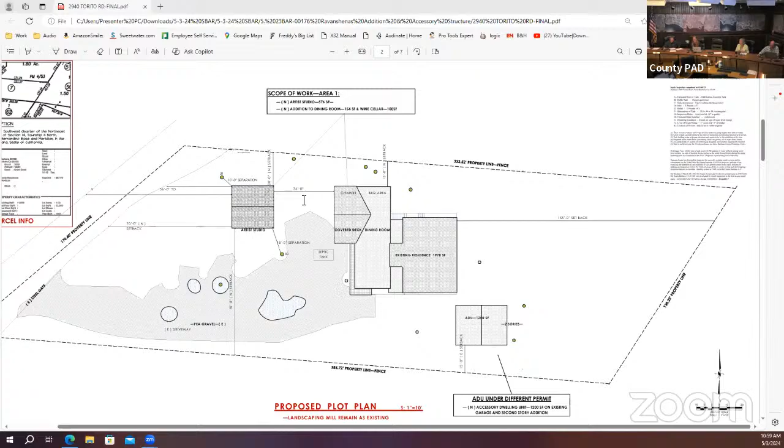But those are pretty significant comments, so please make sure your site plan especially comes back addressed. I may say, really respectfully, I think you need to upgrade the quality of the drawings. I think the board is pretty much okay with the design - is that correct? More or less, the general design seems to be fine.

Yeah, but I'm concerned about the high fire timber structure because that would completely change the look of what he's proposing. That's true. Yeah, the fire - but then also the drawing should show clearly to a casual observer from a distance what is being proposed.

Diagonal siding should be drawn at six inches, and the same with the site plan - one has too many lines, it's impossible to read, the other one doesn't have enough. So really need to bring this to standards. You can talk to the county planners to show you other drawings of what the normal drawings look like, and maybe that can help you out.

I'm not trying to be difficult, we're trying to move this along. I just want the project to meet the normal standards of presentation. Thank you. Okay, thank you. All right, and that concludes our May 3rd, 2024 SBAR hearing. Thank you.